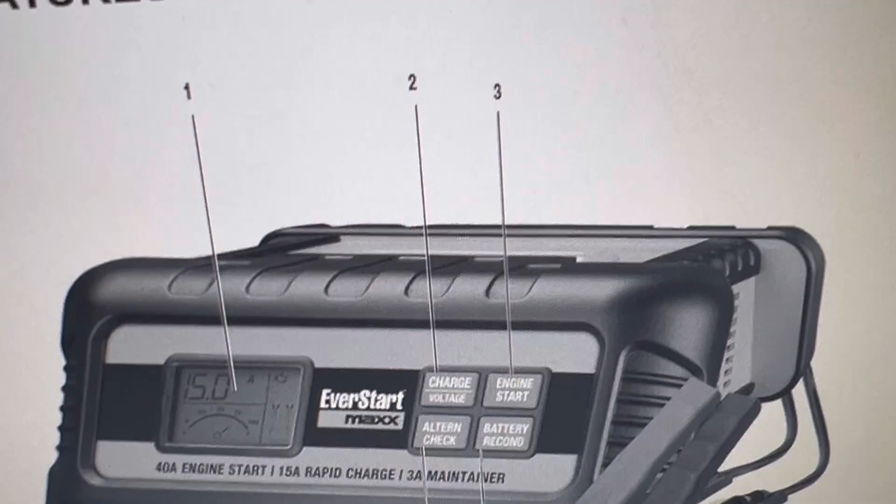But first, I want to show you the parts list. Here's parts 1, 2, and 3. Number 1 is the LCD screen. Number 2 is the charge voltage button. And number 3 is the engine start button.

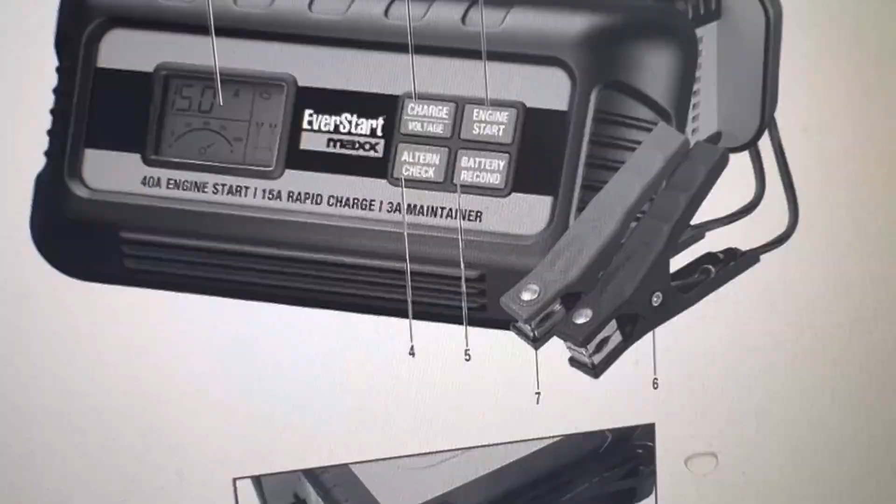For parts 4, 5, 6, and 7: number 4, which I'm going to discuss with you right now, is the alternator check button. 5 is the battery recondition button. 6 is the negative clamp, which is the black one, and 7 is the positive clamp, the red one.

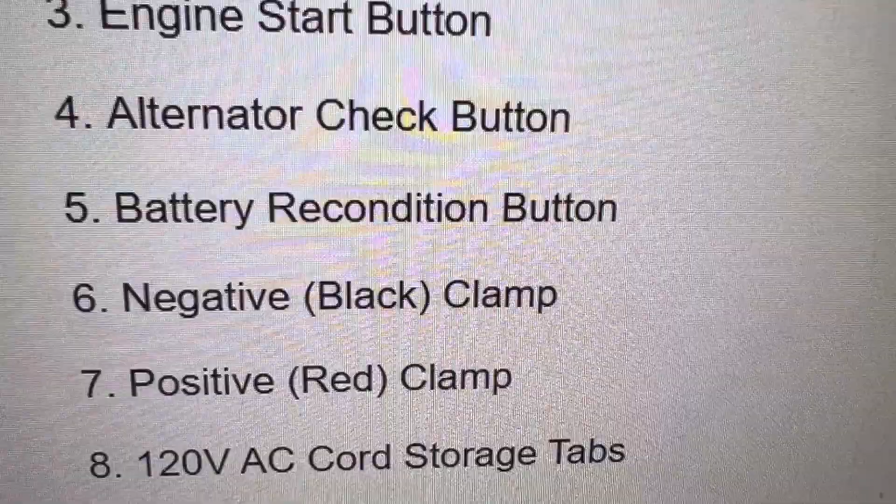For numbers 8 and 9, these are the parts at the back: the 120 volt AC cord, a storage tab, and of course the 120 volt AC plug.

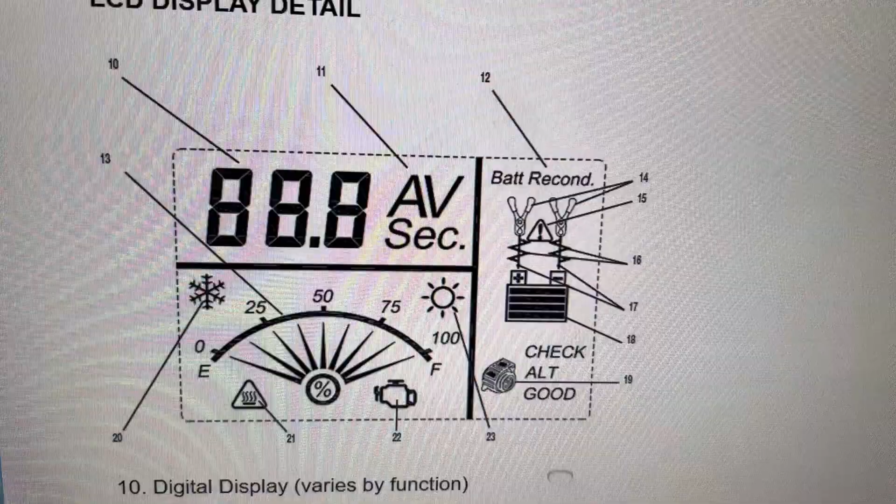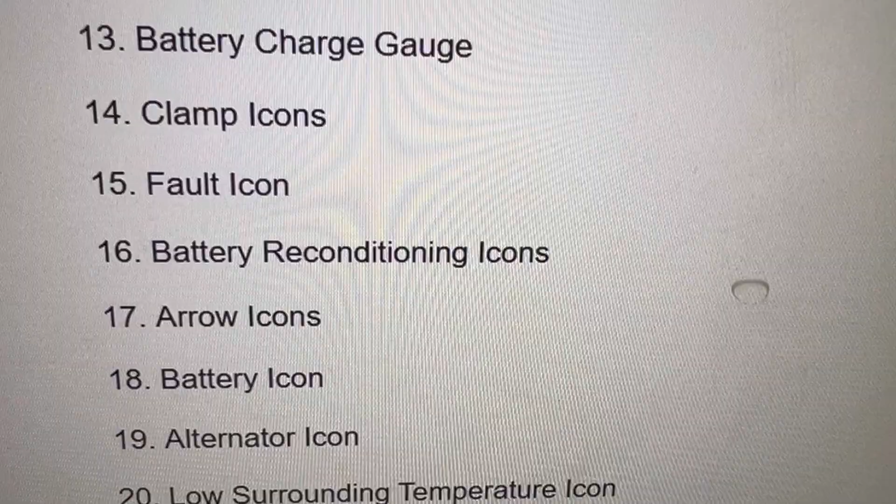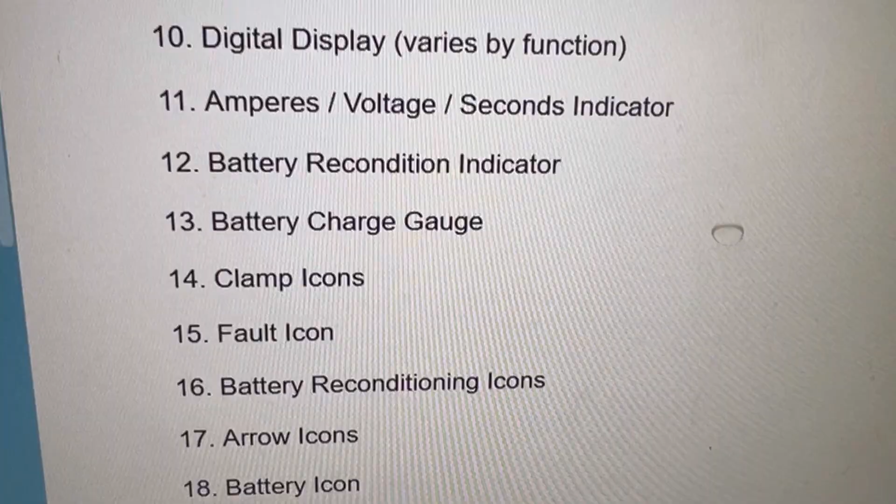For the LCD display detail, here it is, from parts number 10 to 23. I'm just going to leave it here for you to browse, but right now you want to pay attention to number 19, because we are checking the alternator. So you have to pay attention to the alternator icon, which is number 19 on that LCD screen part.

And here it is, using the alternator check function manual. First, you need to set up the battery charger and connect it to the battery, following steps 1 through 2 in the charging the battery section. Number 1, you plug the battery charger's power cord into the AC outlet, first step of course.

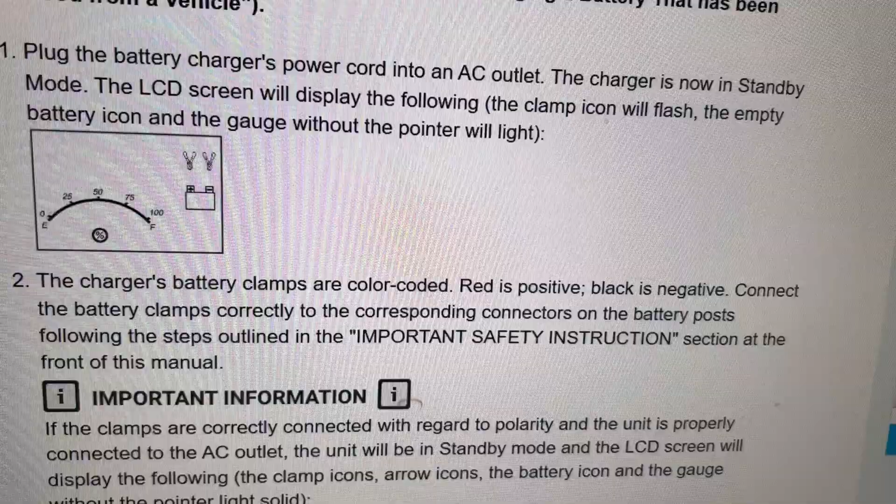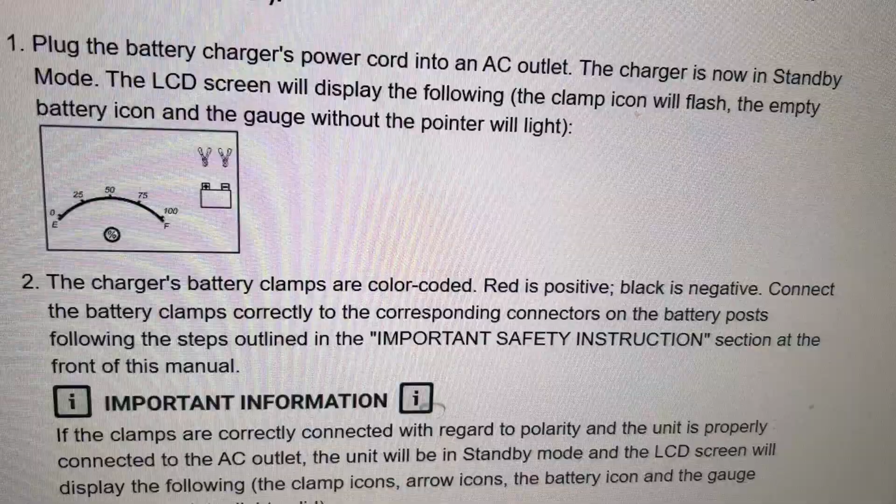And the charger is now in standby mode. Look at that picture, so it has to look like that, in standby mode. And then the charger's battery clamps are color coded. Of course you probably already know it - red is positive, black is negative. You have to connect the battery clamps correctly to the corresponding connectors on the battery posts in your car.

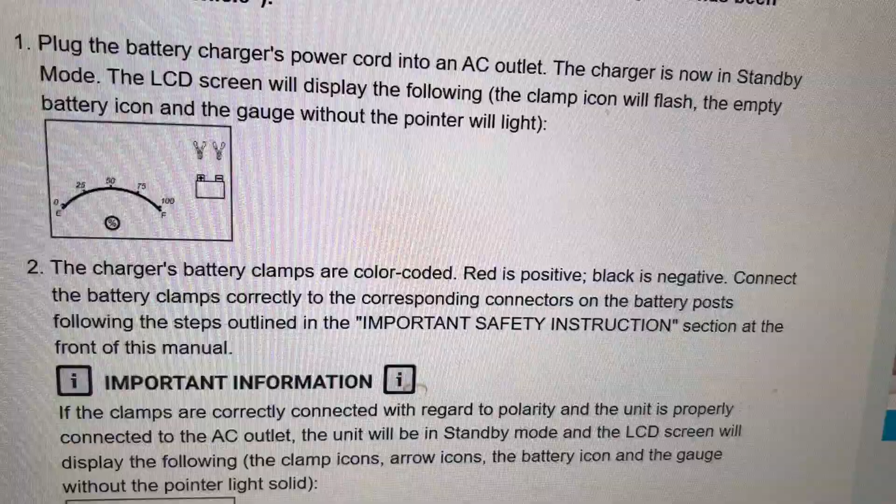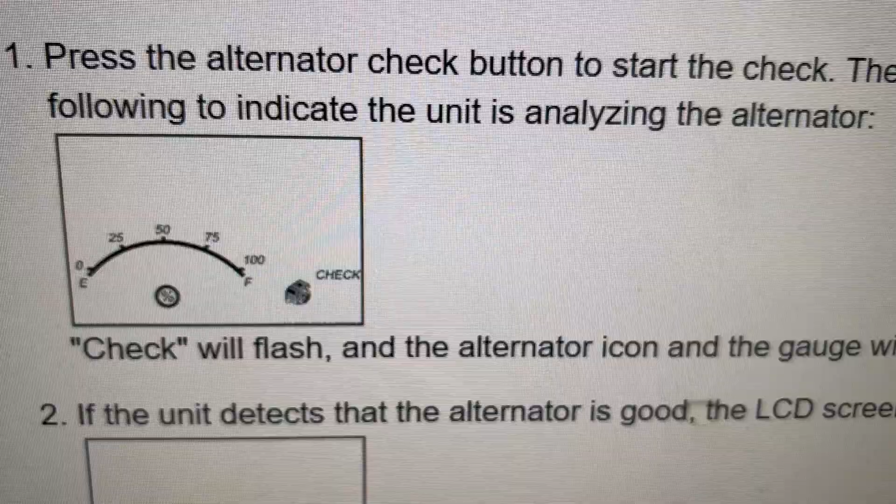Step 1, so this is no load. You have to turn off all your accessories in your vehicle, and then the battery has to be fully charged before you can test the alternator. Make sure your battery is fully charged before testing the alternator, and you have to run the engine long enough to achieve normal idle speed and verify there is a no load voltage. So starting with step number 1, press the alternator check button to start the check.

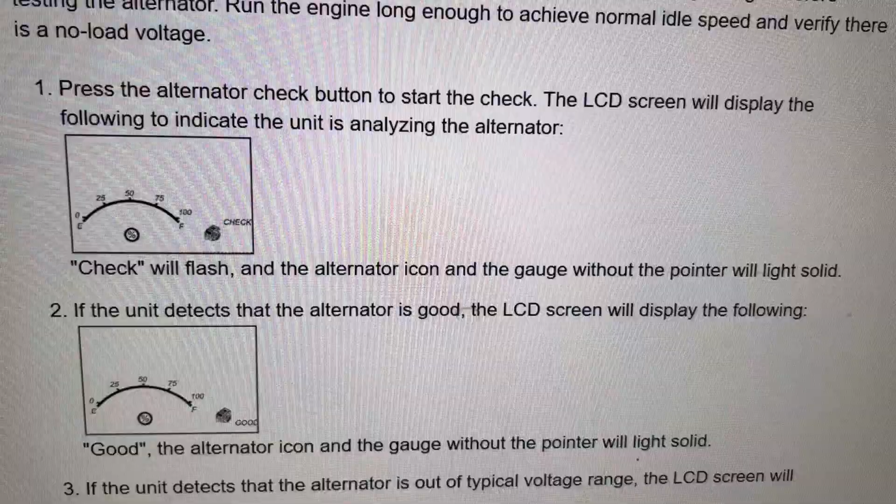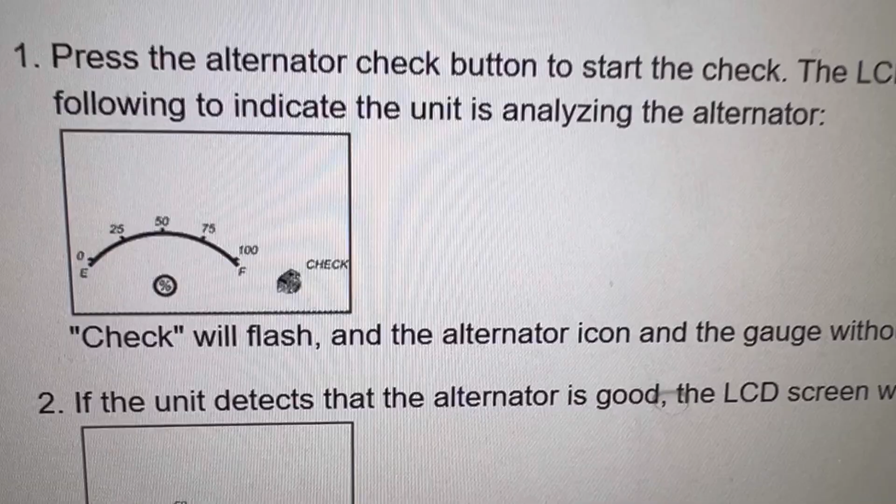The LCD screen will display the following to indicate the unit is analyzing the alternator. So look at the picture on step 1. The check will flash. Look at that diagram, the picture - the check will flash and the alternator icon and the gauge without the pointer will light solid.

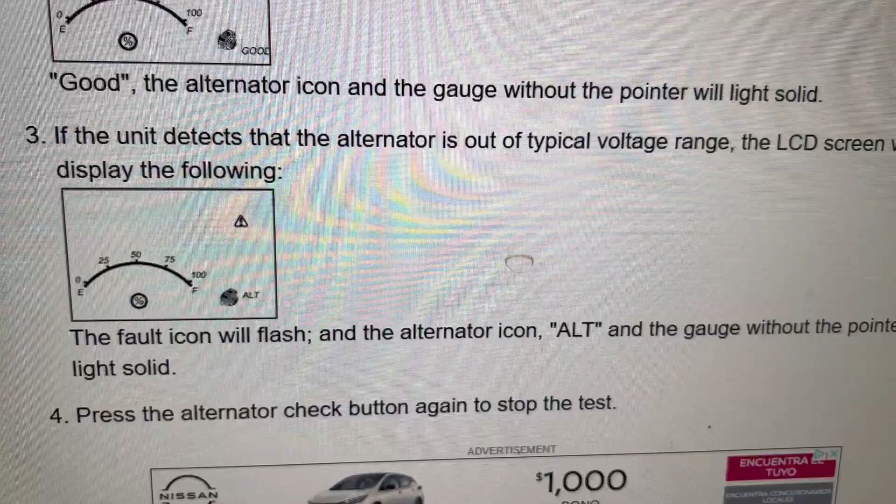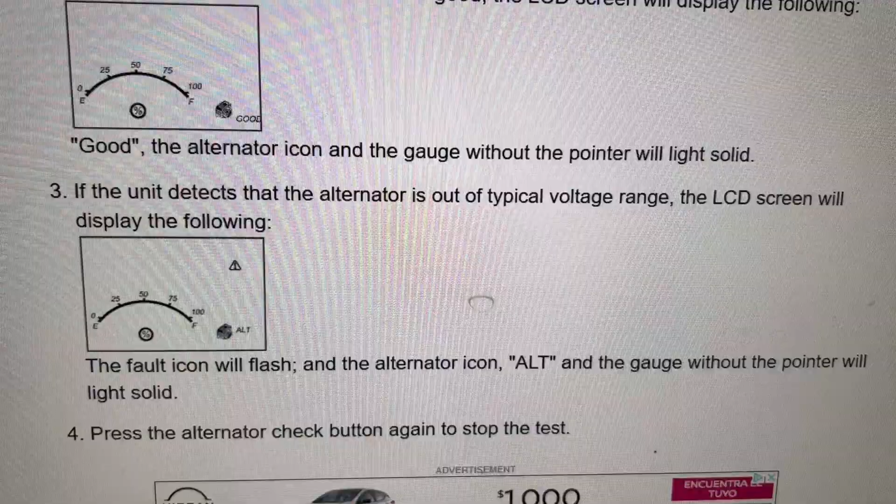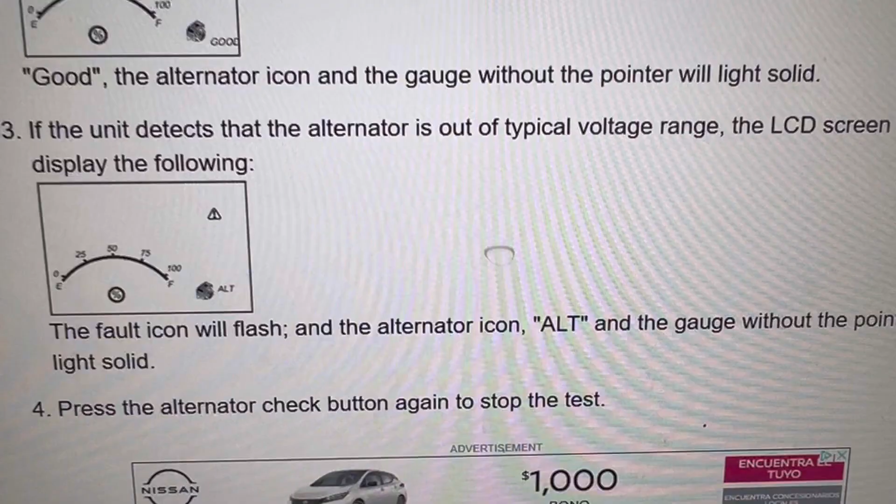If the unit detects that the alternator is out of typical voltage range, the LCD screen will display the following: the fault icon will flash. Look at the top right corner. And then the alternator icon, "ALT", and the gauge without the pointer will light solid. So look at that picture. Step 4, you have to press the alternator check button again in order to stop the test.

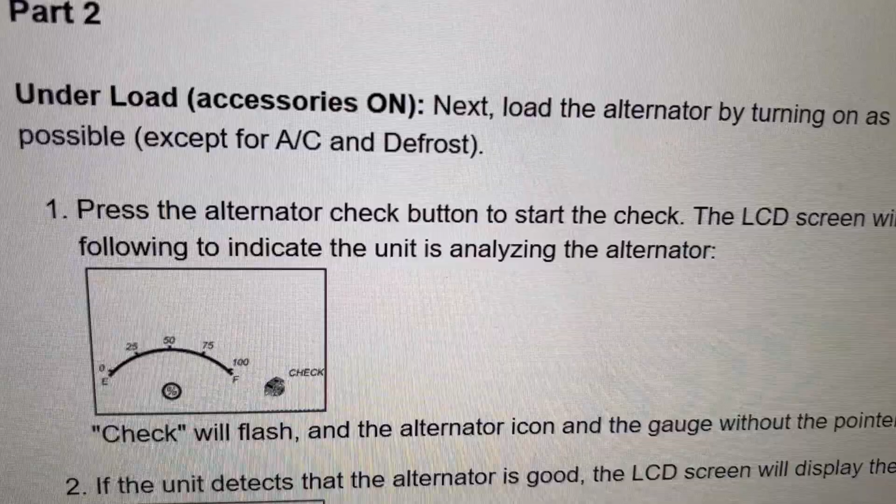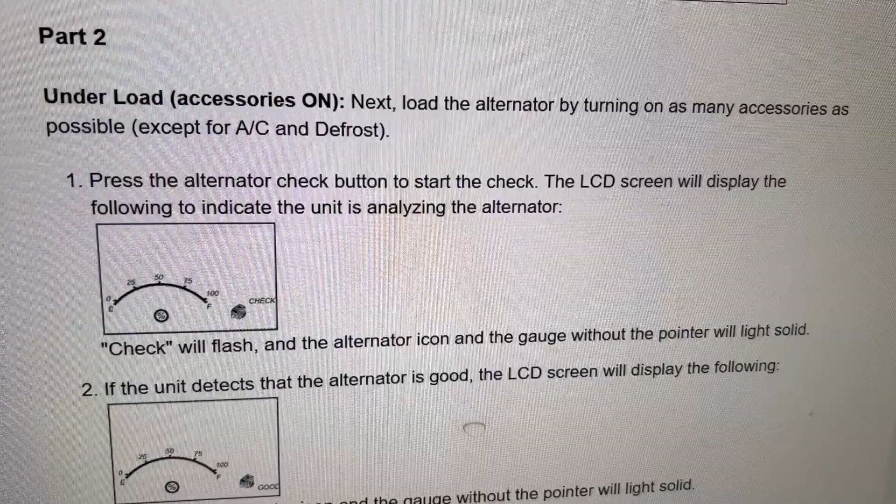For the second part of the test, part 2, this is for under load. So you will have the accessories on. Next you load the alternator by turning on as many accessories as possible, except for your AC and defrost. So again, turn on everything, as many accessories as you can in your car.

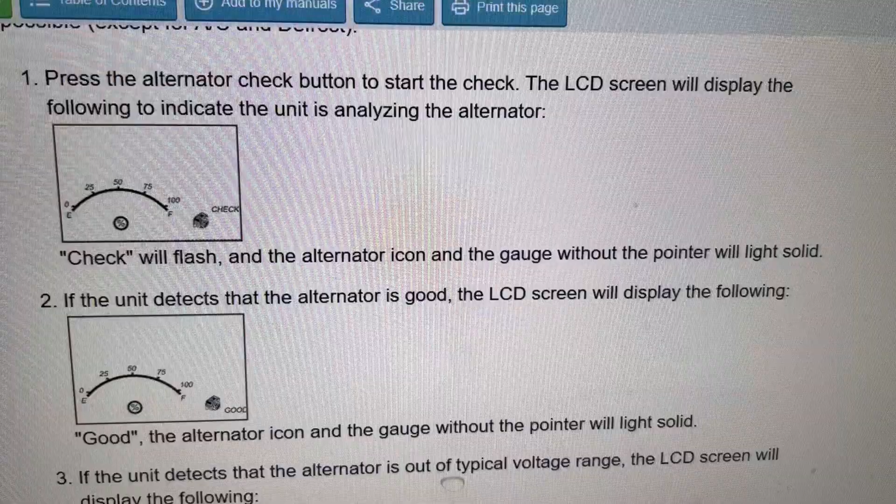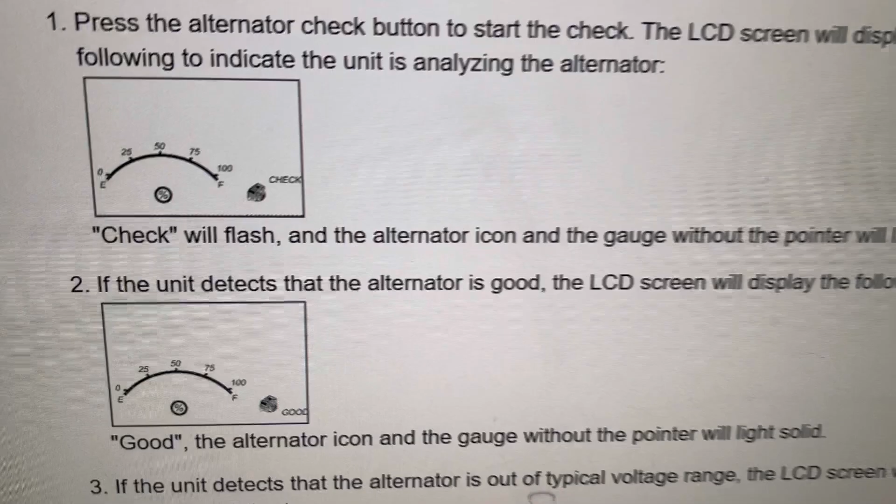So for steps 1 to 4, press the alternator check button to start the check. The LCD screen will display the following to indicate the unit is analyzing the alternator - that's step number 1. Step 2, so back to step 1, the check will flash and the alternator icon and the gauge without the pointer will light solid.

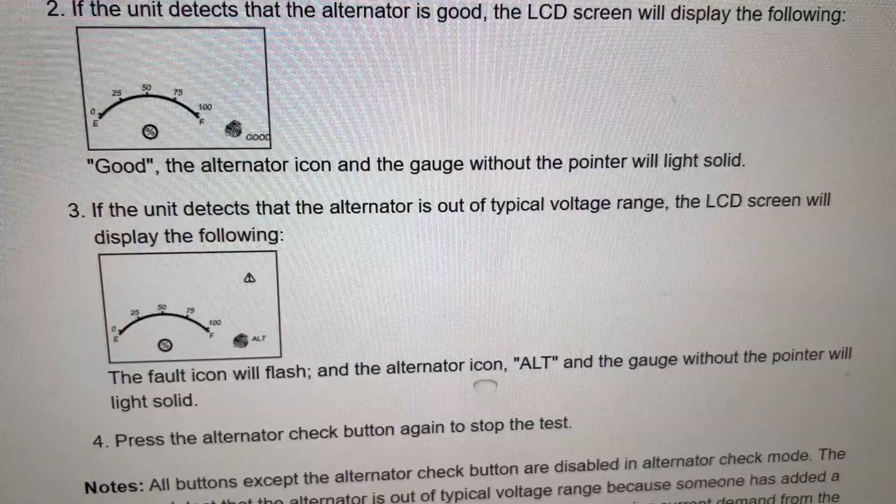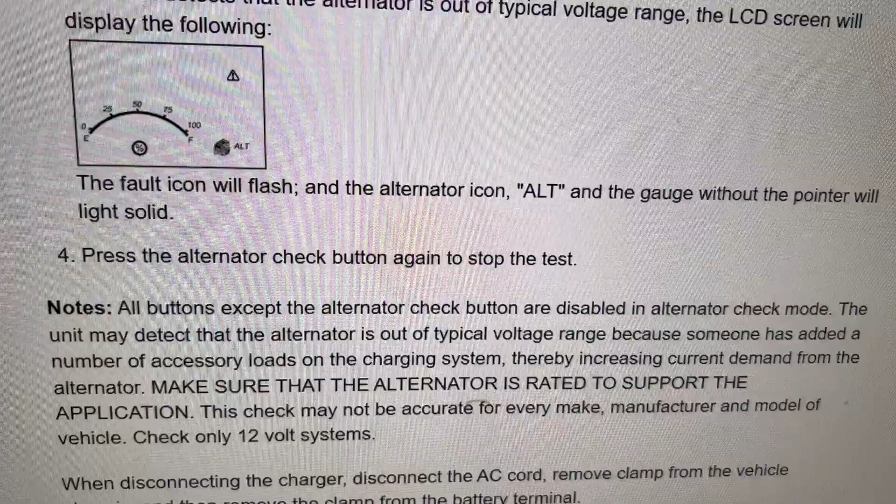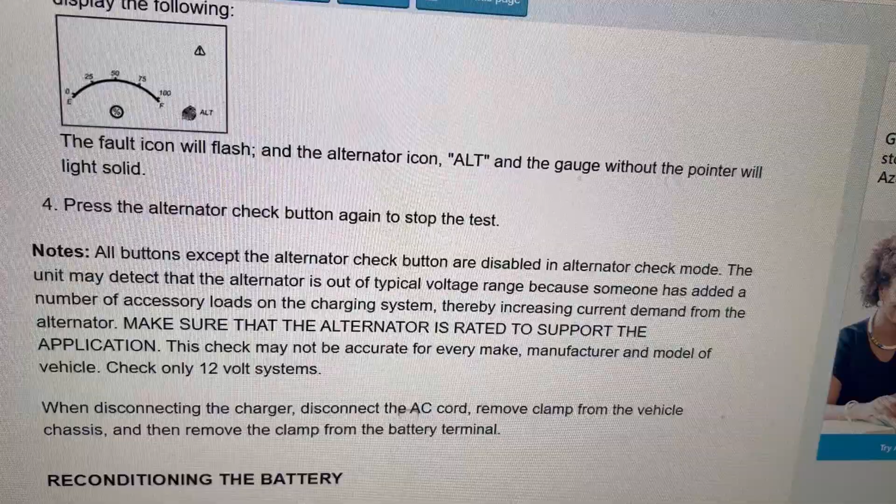With number 2, if the unit detects that the alternator is good, the LCD screen will display - look at the figure below number 2. Go back to number 2: good, the alternator icon and the gauge without the pointer will light solid. And if the unit detects that the alternator is out of typical voltage range, the LCD screen will display the following.

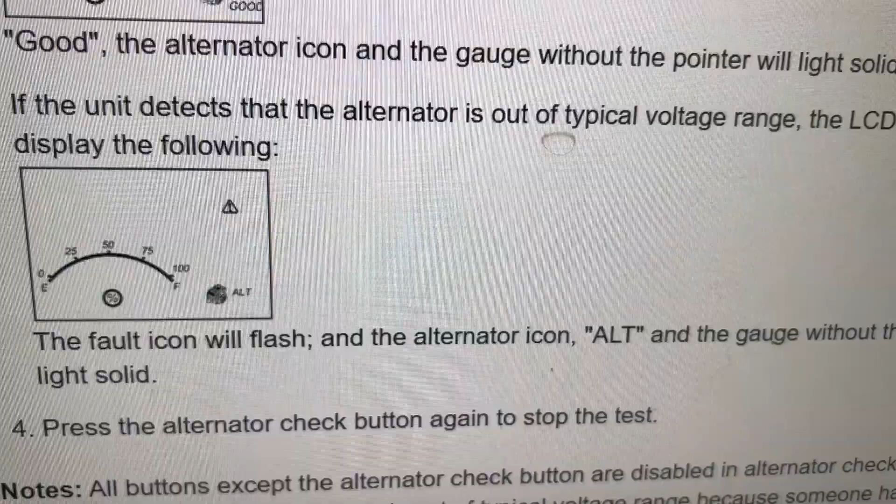Look at the picture below number 3. The fault icon will flash, and the alternator icon, ALT, and the gauge without the pointer will light solid. So that's the picture you see below number 3. When you're done, press the alternator check button again to stop the test.